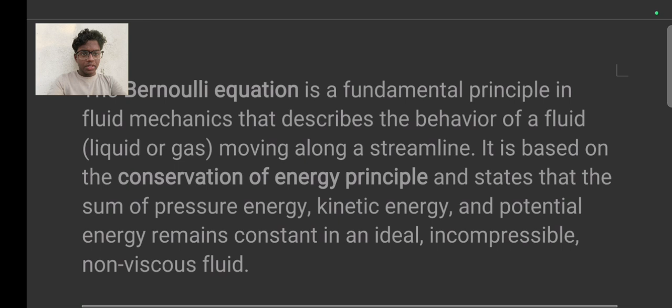Bernoulli's equation is a fundamental principle in fluid mechanics that describes the behavior of fluid, liquid, or gas moving along a streamline. It is based on the conservation of energy principle and states that the sum of pressure energy, kinetic energy, and potential energy remains constant in an ideal, incompressible, non-viscous fluid.

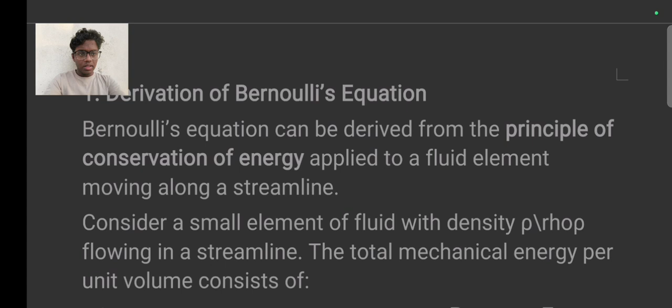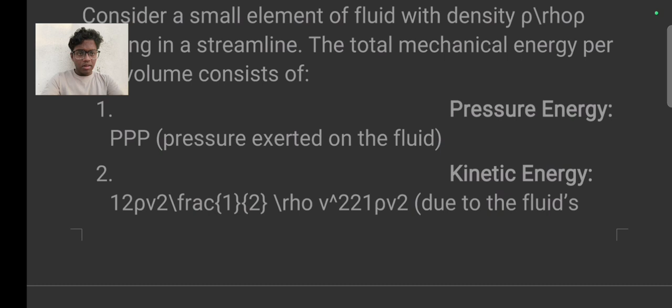This means the fluid flows through the same system. If one energy term increases, another must decrease to maintain the balance.

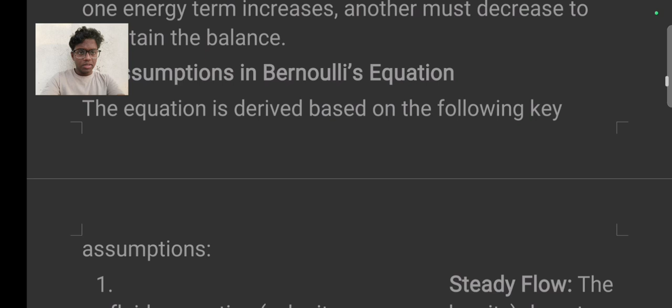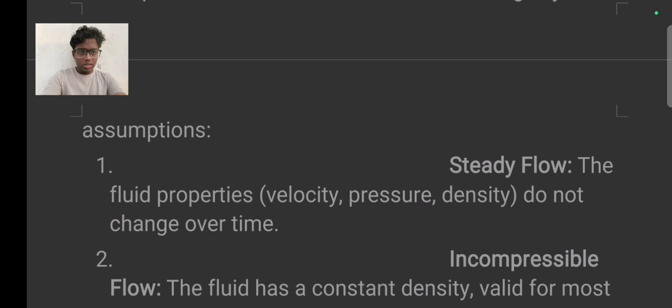Assumptions in Bernoulli's equation. The equation is derived based on the following key assumptions. Steady flow: the fluid properties - velocity, pressure, density - do not change over time.

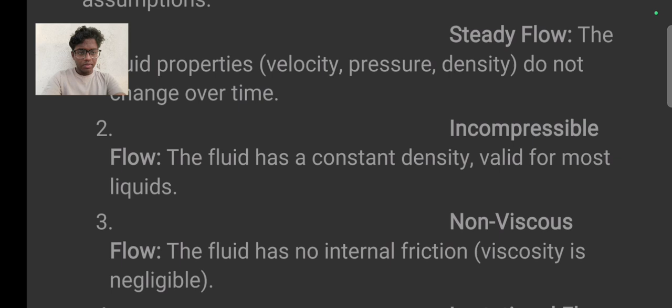Incompressibility of flow: the fluid has constant density, valid for most liquids. Non-viscous flow: the fluid has no internal friction. Viscosity is negligible. Irrotational flow.

No rotational effect and vortex exist in the flow. Flow along the streamline: the equation is valid only along a single streamline.

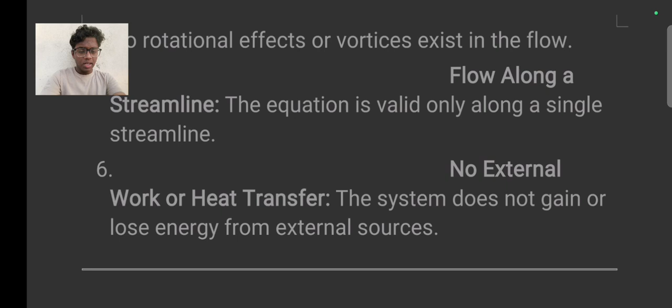No external work or heat transfer. The system does not gain or lose energy from external sources.

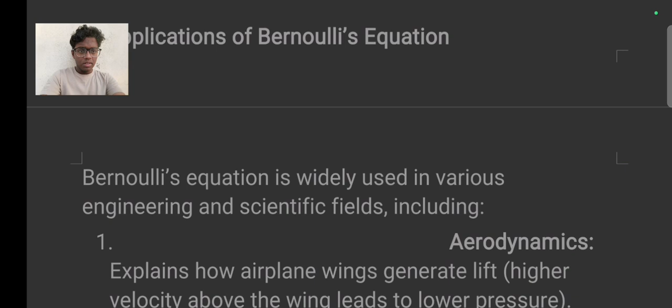Applications of Bernoulli's equation. Bernoulli's equation is widely used in various engineering and scientific fields including aerodynamics, Venturi effect, and hydraulics. Aerodynamics explains how airplane wings generate lift. High velocity above the wings leads to lower pressure, and the Venturi effect is used in flow measuring devices.

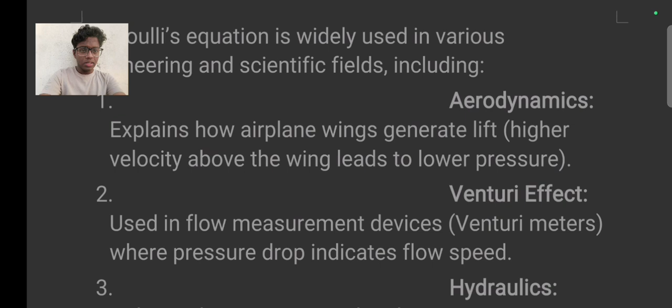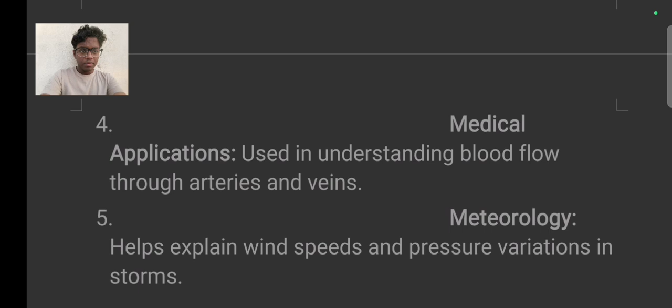Like flowmeters, where pressure drop indicates the flow speed. Hydraulics helps in designing water distribution systems, pipelines, and pumps. Medical applications used to understand blood flow through arteries and veins. Meteorology helps explain wind speed and pressure variations in storms.

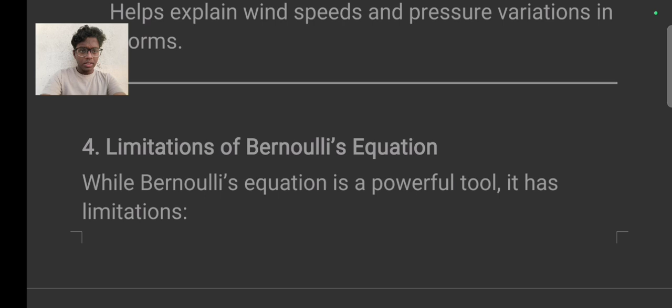Limitations of Bernoulli's equation. Despite Bernoulli's equation being powerful, it has limitations. It does not apply to turbulent flows. It ignores viscosity effects, requiring modifications in real world applications. It assumes no energy loss, which is unrealistic in practical systems.

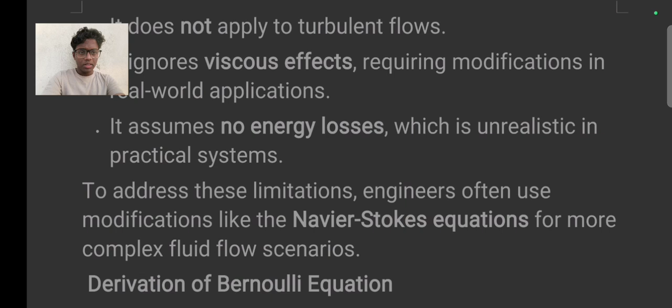To address the limitations, engineers often use modifications like the Navier-Stokes equations for more complex fluid flow scenarios.

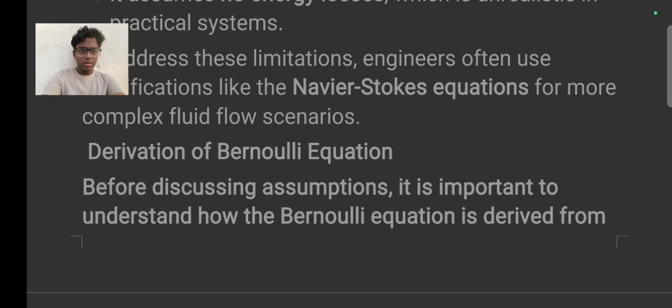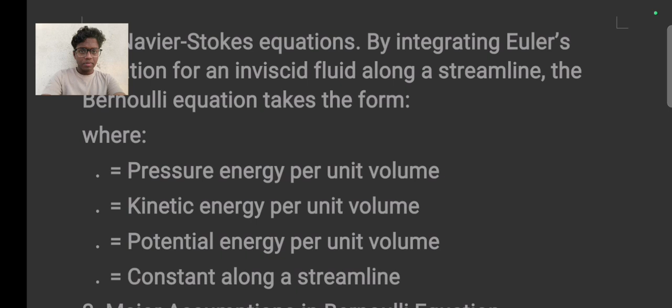Derivation of Bernoulli's equation. Before discussing the assumptions, it is important to understand how Bernoulli's equation is derived from the Navier-Stokes equation by integrating Euler's equation further along the streamline flow. Bernoulli's equation takes the form where pressure is per unit volume.

Some of the major assumptions in Bernoulli's equation - the validity of Bernoulli's equation depends on several fundamental assumptions which we will analyze in detail.

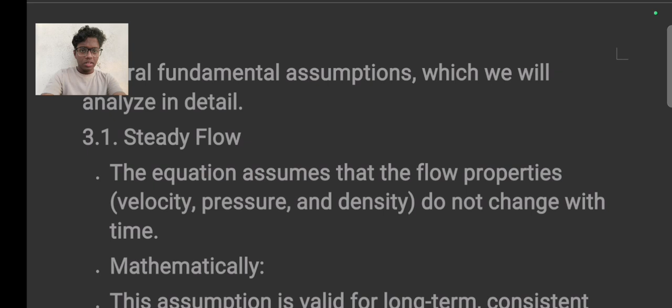Steady flow: the equation assumes that the flow properties - velocity, pressure, and density - do not change with time. Mathematically, this assumption is valid for long-term, consistent flows but fails for transient conditions like pulsation of blood flow and unsteady aerodynamics. Incompressibility of flow.

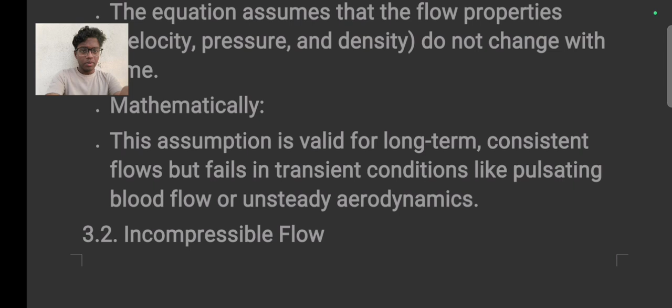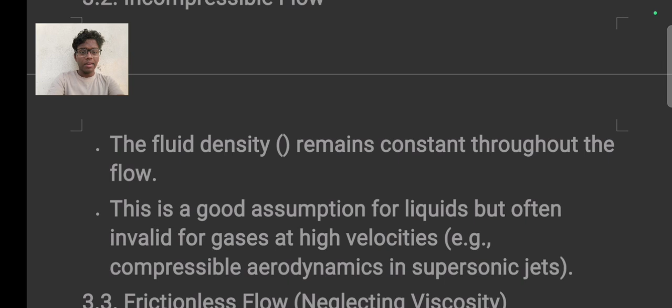The fluid density remains constant through the flow. This is a good assumption for liquids, but often invalid for gases at high velocities. Examples like compressible aerodynamics in supersonic jets, frictionless flow neglecting viscosity.

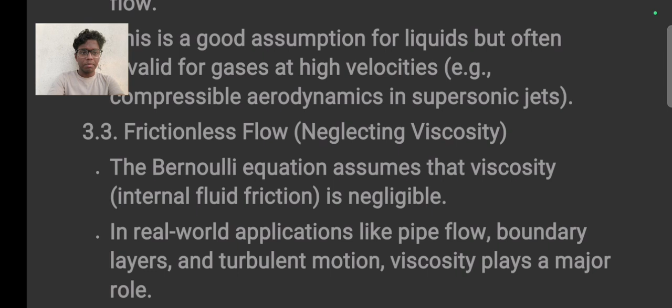Frictionless flow: Bernoulli's equation assumes that the internal fluid friction is negligible. In real world applications like pipe flow, boundary layers, and turbulent motion, viscosity plays a major role. For viscous fluids, this is handled using the Navier-Stokes equations.

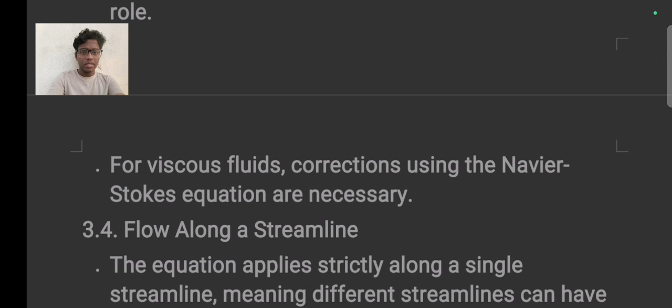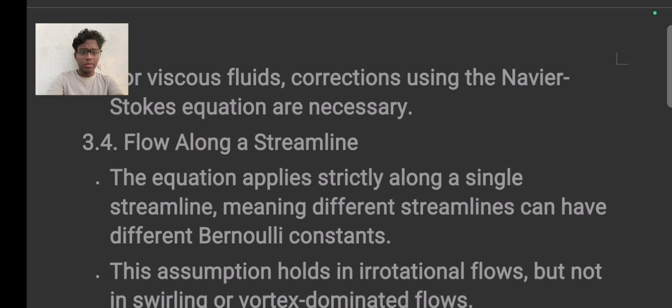Flow along the streamline: the equation applies strictly along a streamline, meaning different streamlines can have different Bernoulli's constants. The assumption holds for irrotational flow but not for swirling or vortex dominated flows.

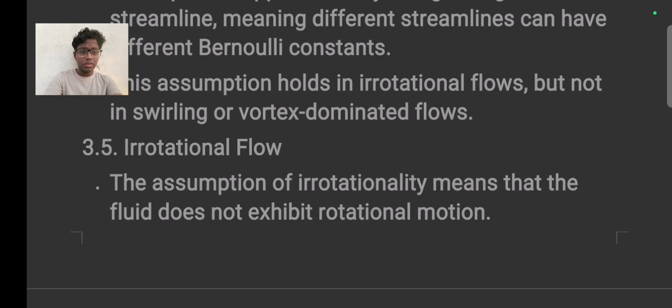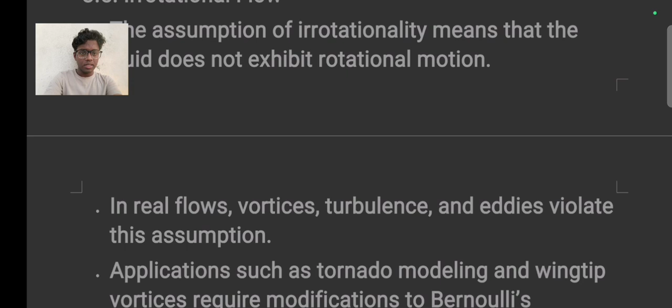Irrotational flow: this assumption means the fluid does not exhibit rotational motion. In real flows, vortices, turbulence, and eddy currents violate this assumption. Applications such as tornado modeling, and wingtip vortices require modifications to Bernoulli's equation.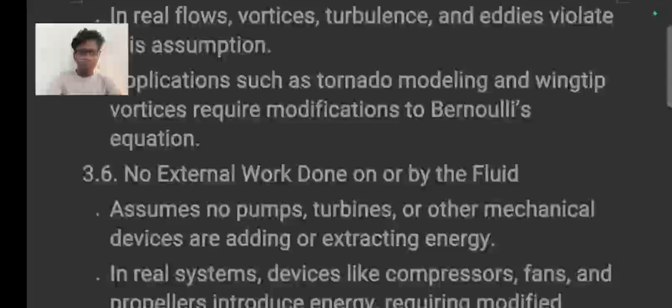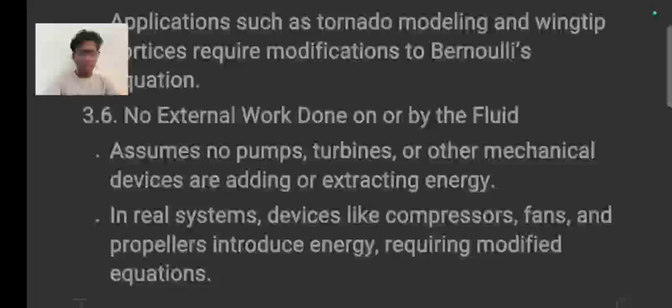No external work done by the fluid - assuming no pumps, turbines, or mechanical devices are added or extracting energy. Real systems with devices like compressors, fans, and propellers introduce energy and require modified equations.

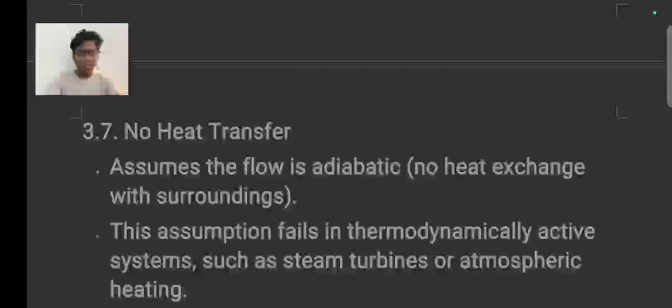No heat transfer: assuming the flow is adiabatic, no heat energy is exchanged. This assumption fails in thermodynamically active systems such as steam turbines or atmospheric heating.

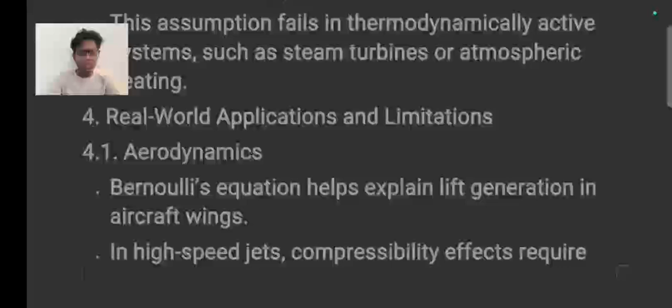In real world applications and limitations, in aerodynamics Bernoulli's equation helps with lift generation of aircraft wings. At high speed jets, compressibility effects require using the compressible form of Bernoulli's equation. Hydraulics and pipe flow: in water distribution systems Bernoulli's principle is applied, but corrected for viscous losses.

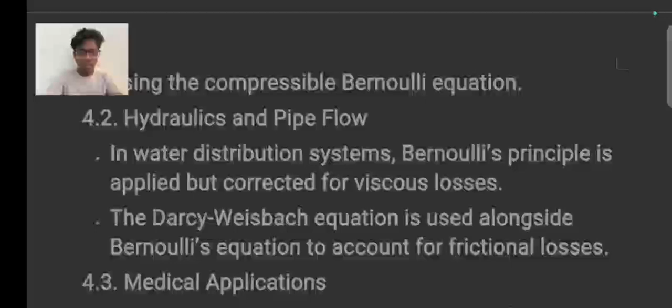The Darcy-Weisbach equation is used alongside Bernoulli's equation to account for frictional loss. Medical applications use it to analyze blood flow in arteries and veins, but it fails in pulsatile flow conditions and requires time-dependent corrections.

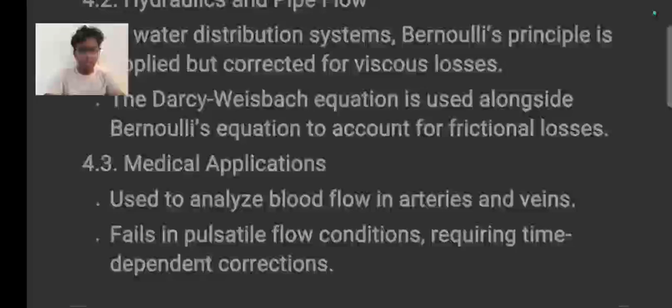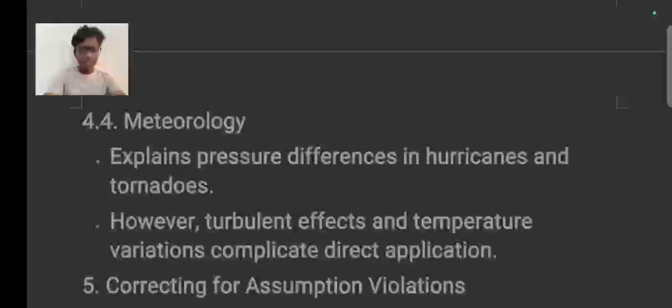Meteorology explains the pressure difference in hurricanes and tornadoes. However, turbulent effects and temperature variations complicate direct applications.

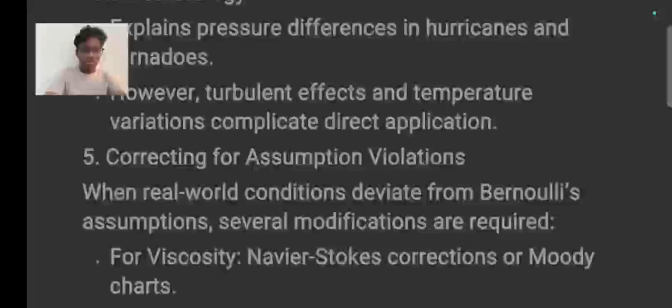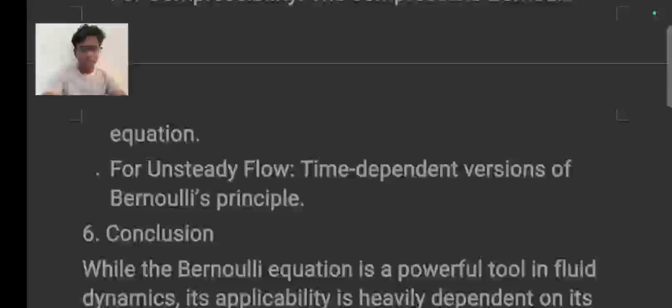Conclusion. While Bernoulli's equation is a powerful tool in fluid dynamics, its applicability has heavy dependence on its assumptions. Understanding these assumptions is crucial for engineers, physicists, and research workers dealing with real-world fluid systems.